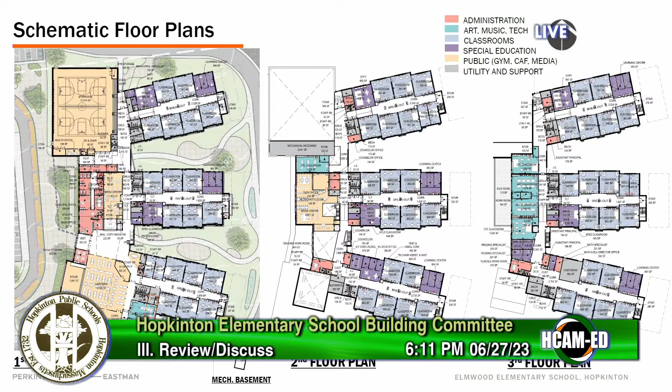Not a lot has changed. I think we were here last and we reported on some of what we heard at the second round of faculty focus groups, and there are a few standing questions. We're waiting for the superintendent to get back to us on some minor changes, but we're down to the realm of just like an office or two, and whether it's one big space or split in half. So these really aren't scope issues.

The one place that we have been continuing to evolve are the mechanical spaces, as well as the cafeteria. So on this plan, what you can see here over on the upper left by the gymnasium is what we're calling a mechanical mezzanine. So we've got a very large 2.5-story structure that's the volume of the gym. We have some offices, toilets, and storage space at the beginning, so we're trying to use that first structural bay to put some mechanical equipment in there.

Right now, we don't have it reconciled with the actual equipment. The alternative to putting the equipment here is just to put it on the roof. But that's pretty tall equipment. We'd prefer not to do that, even for the longevity of it. This is somewhat free space.

It's not entirely free. If the offices, storage, and everything existed as kind of smaller space, we'd either have to build the walls all the way up the 2.5 stories or insert some sort of ceiling or roof system within that space. There certainly could be other options explored, but we kind of saw this as an easy grab, not much of a premium to protect the mechanical equipment. So that still needs to be reconciled.

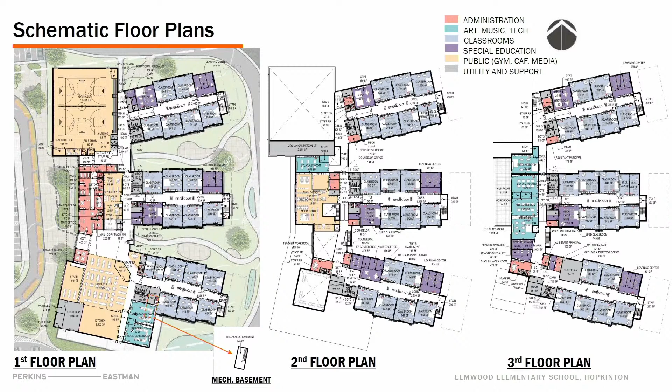A more reasonable approach, rather than spending the money on the infrastructure for the school, the hardware, is to get a container or two and plant plants around them - they'll last probably as long as the school does. You could do a gravel pad somewhere. It'd be way cheaper, a lot less money.

The other thing we can do is look at the specifications, have a conversation about what you really need for attic stock, because sometimes you get so much ceiling tile or floor tile that it's a whole building's worth, and you'll never need this much of it. But you paid for all of it.

I just wanted you to think about it now, something you might want to look at rather than saving a little money, and then three years from now when we say, oh, what are we gonna do with this stuff? What is it called? Attic stock.

Basically they give you like two cans of paint of every color in the entire building, all the floor tile, all the ceiling tile. It's a lot of stuff.

We're not gonna have that many colors to fill half this room, are we? Talk to them. We don't usually have that many colors. If you're asking me that question, Mrs. Conner, no, we're not gonna have that many colors. Gray and white show up everywhere. Just so we're thinking about it.

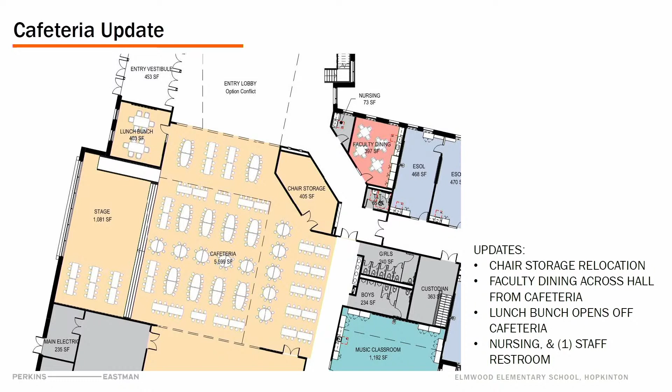Onto interior materials. We really have the same information that we brought the first time with some changes or supplements based on comments we heard. One thing we did is we don't have the full takeoff of all the areas within the school, so we can't give an accurate picture of what might be drywall or what might be certain finishes.

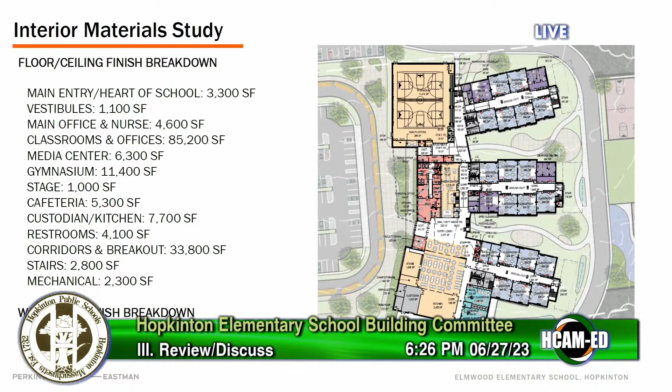The wainscot, which is the wall protection that runs up - in this case we're saying 4 feet high - we did a linear takeoff. It's not going to be exact, but this is all for relative costs. So we're just going to start with ceilings, walls, floors, and wainscot.

What we talked about last time were the pretty common standard materials - the high performance acoustic ceiling, trying to limit the number of tile types for a couple reasons. One, as we just discussed, for the sake of maintenance and stock. The other, because learning occurs everywhere - even the corridors are breakout spaces for learning, so acoustics are important.

We also know we have painted drywall ceiling. You can see between the acoustic tile and drywall there's a big difference in price - it's more expensive. We try to avoid drywall, which is also called soffits. There are areas like toilet rooms or vestibules that receive a lot of moisture, so it's recommended in those locations.

Then we have, of course, painted structure. When we say painted structure, there's a little bit of a premium in the structure because it'll be an acoustic deck, which this is not, that I can tell. But painted structure is exactly what we're seeing above us - otherwise inexpensive.

And then we introduced the acoustic wood look ceiling, which is the most expensive of the materials. Our conversation here was, well, maybe we can avoid this, or at least scale it back.

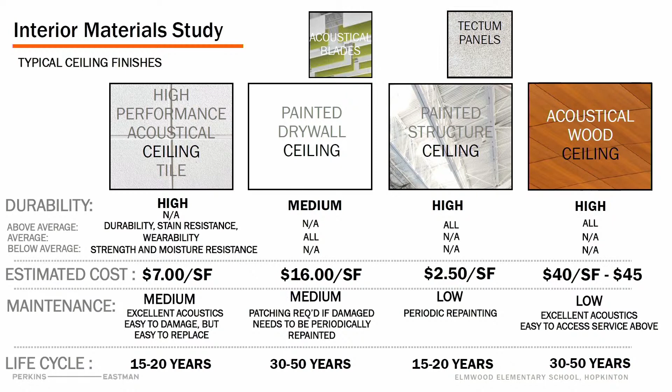So one of the things we did is when we put costs to all these, our proposal was pretty much everywhere in the school would be the acoustic ceiling tile. We would limit the drywall to vestibules and maybe just a little bit of the corridors and restrooms. The painted structure would be in the gym, the stage, mechanical, electrical, and IT spaces. And we were going to have the cafeteria and entry vestibules with the wood look.

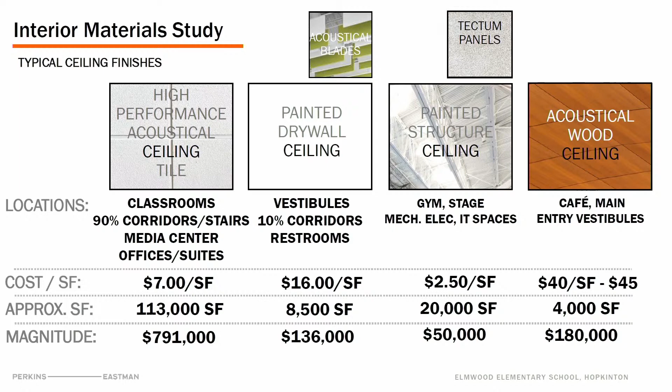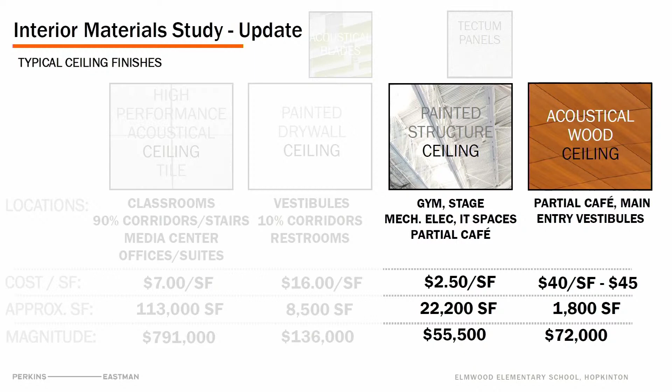That was about $180,000 of the total price. What we're proposing is to scale that back and look at the cafeteria, using a combination of exposed painted structure, which is on the lowest end, and acoustic deck, but incorporate just a little touch so it can help us dress the stage and get some good reflection for performances. You can see it comes down more than $100,000 just by limiting the use of it. That's one of the updates, and we're happy to entertain others, even built into the vote.

We move on to the wall finishes. The first box you see was drywall, which is the base material we'll use everywhere. What we wanted to do was incorporate what's called FRP, Fiberglass Reinforced Panel. It comes in a lot of different looks. Some of it is hospital grade, that bubbly white look, very inexpensive. It can also look like wood or a grainy veneer. It's still flush, it's still cleanable, it's still the same material.

We have used this on schools. Essex Technical High School actually has FRP in the corridors. You can see it's much less expensive than the porcelain wainscot we were proposing for all the corridors. We also started a discussion about how you handle the seams, because that's the trick with this material. In and of itself it's great, but it's a thin material with seams. If they're picked at or worked on over time, you can see there's a 20-year life compared to a 50-year, but that doesn't mean there won't be places requiring repair and attention.

When we've used it, we've detailed it to really cap the top and control it for tighter seams. At Essex we used a wood cap, and we used this underneath it to hold it, so it didn't have the plastic piece at the top. At the Marathon School there was a lot of discussion about it too. They did a metal cap, something fluted. I remember going back and forth with the architect about the finish on different structures, the metal cap, the outside corners, and the pieces joined to one another. There was a vertical strip that looks pretty industrial.

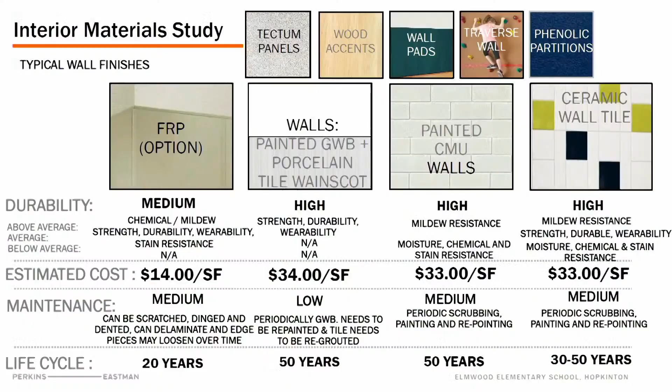Nothing's changed with the CMU walls as far as durability, appropriate places to use it, or ceramic tile in toilet rooms. So if we look at the square footage, we're suggesting two options where the FRP wainscot could be used at the heart of school corridors and cafeteria, same with the porcelain tile wainscot, and you can see the difference, 212 versus 516, so that's the order of magnitude. If we could do a hybrid where we just focus on the high traffic volume areas, the community areas, and keep those porcelain, but then go to FRP when you get into the quiet academic zone, you'll have a blended rate. We won't have the numbers for you now, but that's certainly a direction to go in. And then we would still suggest the stairwell, gymnasium, restrooms, at least the large group restrooms being CMU.

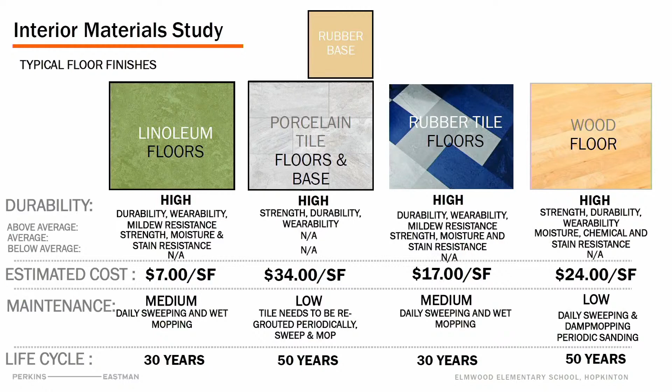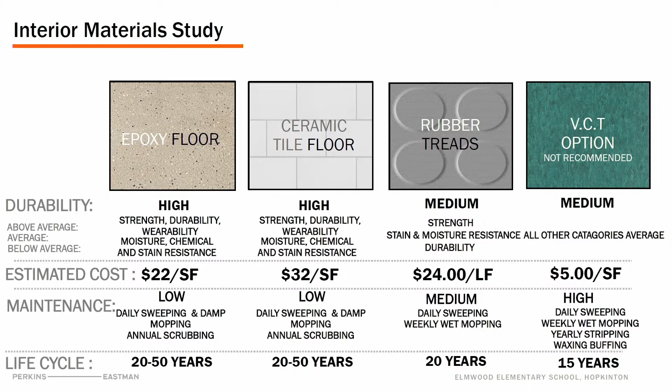And then we would use ceramic tile on wet walls, particularly the single-user bathrooms. Moving on, we don't have anything to show on floors. We introduced linoleum, porcelain tile, rubber tile, and of course wood flooring in the gymnasium. Epoxy as an option, ceramic tile floor in toilet rooms, the use of rubber for stair treads. The VCT flooring was not recommended, but we put the cost on here. We didn't necessarily hear the need for a change, so linoleum is the primary flooring throughout the school. The porcelain tile, we're suggesting, just like the wainscot, maybe only in the heart of the school, the high traffic area.

The stairs would have rubber tile potentially. We wouldn't recommend it at the gym or the corridors. The gymnasium and the stage would be a wood floor. And then in the kitchen, there was some discussion about this, but there's the epoxy floor as an option versus ceramic tile. That was a restroom option.

And then the rubber treads, as I had mentioned, but I can scroll back and forth through these. You can see the magnitude of costs. Pretty inexpensive to use linoleum. That is the majority use here, coming in just under $1 million for all the majority of the flooring. And then the limited use of porcelain, the appropriate use of the wood, and the epoxy, ceramic, and other.

So, I'm sorry, I might have misheard you. Did you say, so for the stairs, is it rubber tile? It's a combination. There's rubber treads that actually are the rubber whole tread length, and then there's rubber tile at the landings.

I didn't see any, like when you get to the cost per square foot and approximate square footage, the rubber treads are the treads, but there's no rubber floor tile for stairs zeroed out. Nobody's saying there's no square footage or total. They're not recommending a difference for the stairs. It's sold by linear foot.

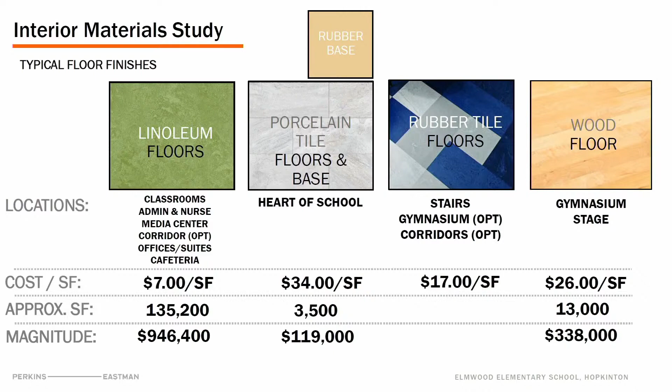Any more slides on this? I don't think so. No.

So it looks like there's been some additional cost savings on some things that you shared. It's kind of hard to keep track of everything here, but is there a cumulative number now on what we've seen, even though we know this isn't the end? Because Mike suggested the hybrid, and that will be another number. Is there a cumulative number on everything? And where I'm going with it - if so, where is that compared to what the allowance was on the construction budget that we started with a long time ago?

So I'll need Dan's help with this, but for what we're seeing now, for the material choices we were starting with, which on the interior didn't seem to be that divergent from what you would expect - based on the comments, this is about a $400,000 swing reduction. It seems like it's about $100,000 in the cafeteria ceiling, and about $300,000 in the wainscot. Well, actually this will be blended, so it might be more like $350,000 swing. Okay, thank you.

As far as how that compares to the initial costs, they were square foot costs, so they didn't get into the details, but they were based on probably very similar material choices. Right, so the prior estimate was more blended. Now every estimate we get gets more and more granular, and you'll start to see things broken out. It started as kind of a whole wall assembly - now you're talking about what's the skin of that wall, how thick is that wall. So, and I know, I love your phrase - the pencils go down on July 12th, this gets sent out.

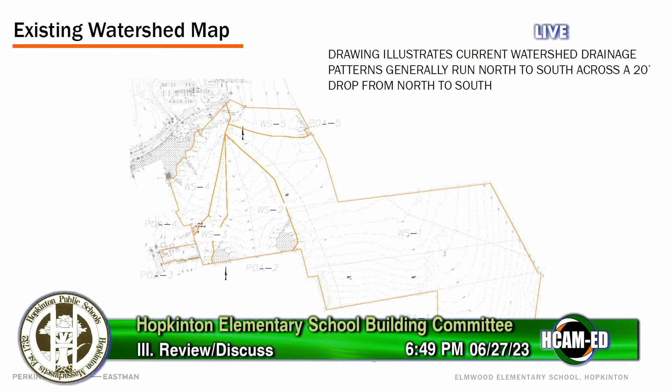So, we ready to talk stormwater? We are. We talked earlier about how we had the test pits dug out there, and the geotechnical information showed the water table was about 2 feet below grade. It turns out from the 3 test pits, it's actually about 5.5 to 6 feet below grade, which is good news, not great, but better than 2 feet.

This first drawing that Steve Powers from Samiotes provided, with drawings and notes, illustrates the watersheds that are there. You can see watershed 1 is substantial, and I think that's the one of most concern to the neighboring properties. That's the one that pushes all that water down towards that neighborhood.

Watersheds 5, 4, 2, and 3 all get captured by the wetlands in those areas, spilling off towards those bodies that catch them. So there are catchment areas for those other 4 watersheds, but the one large one where we're putting the building is the primary one. We're also going to get more data on the northern part so he can understand the full picture, since we've already gotten data transmitted on the northern piece, because there's a big grade coming down with stuff coming from there too.

So that's going to be factored in here as well, so that piece of it is not being left behind. Right here, this big area here, the Blueberry Lane extension area.

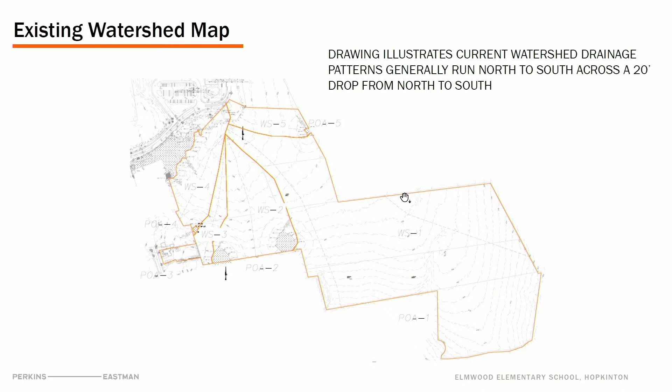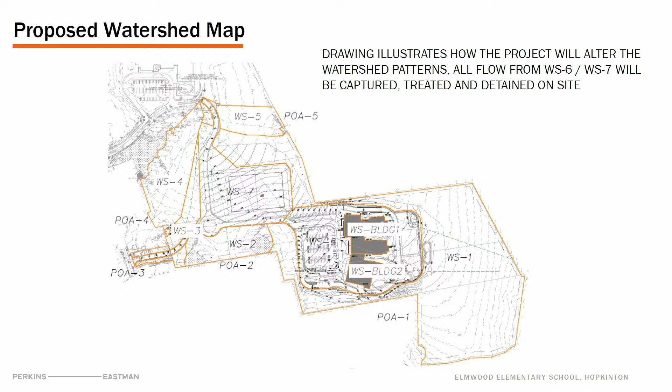So here's the current close-up of the site itself. You can see in the front parking lot, he's proposing some substantial Cultec, or basically underdrainage systems or catchment areas, and one in the back under this small play area. This still needs to be coordinated with the geothermal fields, because that's where the geothermal is primarily located, so there may be some tweak to that back one.

And then he has this open air detention basin, which is beyond the developed area. There'll be some more tree clearing back there, and if we opt to go this way, an open air detention. So are we required here to detain and infiltrate the 100-year storm?

As I said, he's got a large area of detention and a smaller area in the back. He's picking up all the front of the site and half the front of the building, and the portion of the roof and the back playground areas with that smaller detention area in the back.

And also, if I'm correct, the placement of the infiltration areas, to the point we made earlier about regrading on the site, we're placing them on the downhill slopes, both from the grading perspective, because those are fill areas. So the Cultec system is a buried area that'll be placed closer to the existing grade and then built up, as opposed to having to dig down and replace that soil.

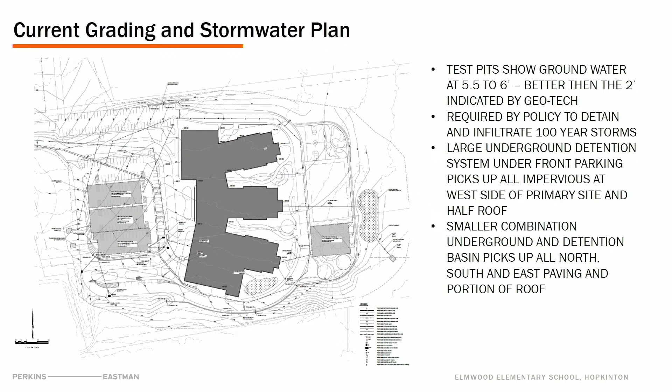Have they looked at sewer service going off to the south? We haven't looked at that yet, but I think we had all decided that would be the best possible, closest route if we can get access to it, plus the fact that it doesn't need to be pumped.

Right, if those of you that have been down there during rainstorms, the water runs off the site into the street today, so that's the baseline. It literally runs off the hillside around these houses just off the bottom left there, and then runs to the nearest catch basin. So that's how it's being handled today in those locations.

So when you say meets or exceeds, it could potentially make it better for those neighborhoods? Yes, that would be the intention, is to make it better. The minimum is to meet. Meaning that whatever we do cannot make the situation worse anywhere around the site.

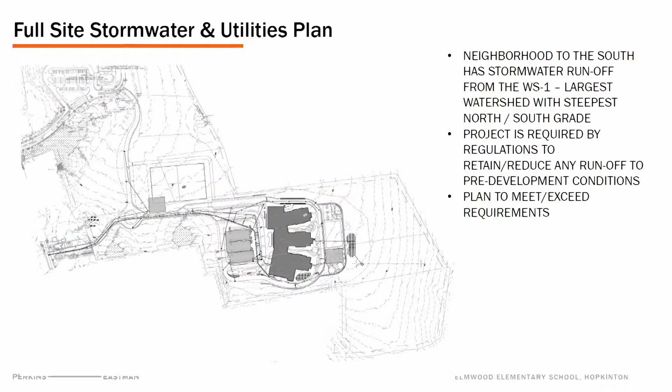So this is a topic and a question that's coming up for the forum too. We'll get to the forums later, but I think having an understanding from the public about the stormwater management would be an important topic in an upcoming forum as well.

Yeah, I think once we kind of tighten all this up, this will be big on the website too, so anybody who hasn't tuned into our forums or needs to understand better will have access to this, because I think it was kind of a sticky point with some neighbors after the marathon school.

And once it's designed, yeah, I think that's a good point, Tim, because one of the things I was thinking similarly is, and this might be a working group topic, is about the website. Right now, for the most part, what goes up on the website is this full packet deck. As we get into more detail, I think breaking these up so it's easier for people, so somebody who lives in that neighborhood who just wants to know the stormwater plan, we can point them back to the June 27th meeting packet and have them scroll through.

The more of these we could get as their own links, I think for us on the committee too, we'll get questions, and it's easier to just give them a link than point them to it. So we might want to think about the architecture of documents on there as a future working group topic. Absolutely, it's been a discussion so far in the work group that the FAQs need to be looked at and drafted, and we can certainly point them back to the meetings where these robust conversations occurred, as well as the meeting packets that respond to those topics.